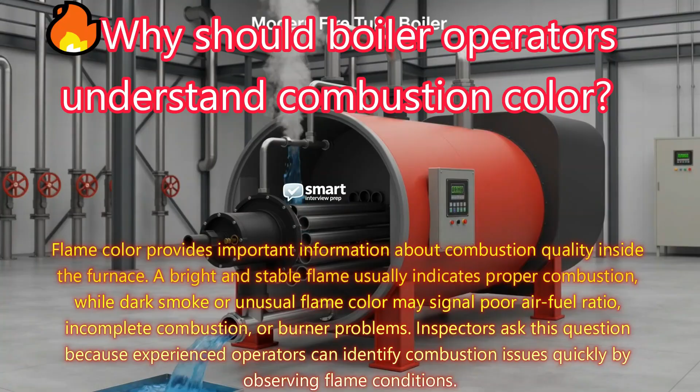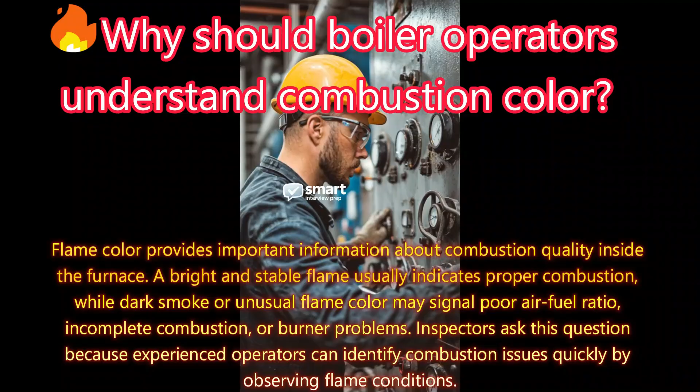Why should boiler operators understand combustion color? Answer. Flame color provides important information about combustion quality inside the furnace. A bright and stable flame usually indicates proper combustion, while dark smoke or unusual flame color may signal poor air-fuel ratio, incomplete combustion, or burner problems.

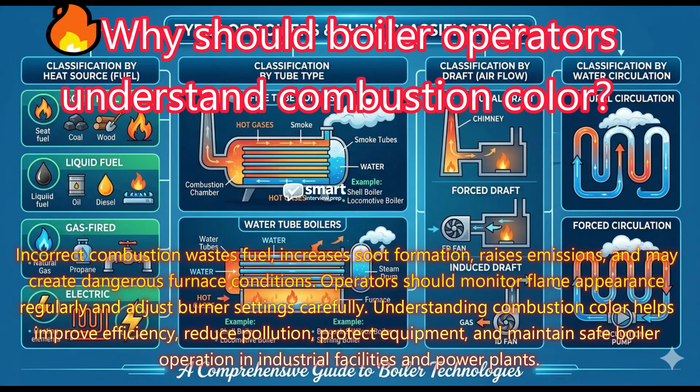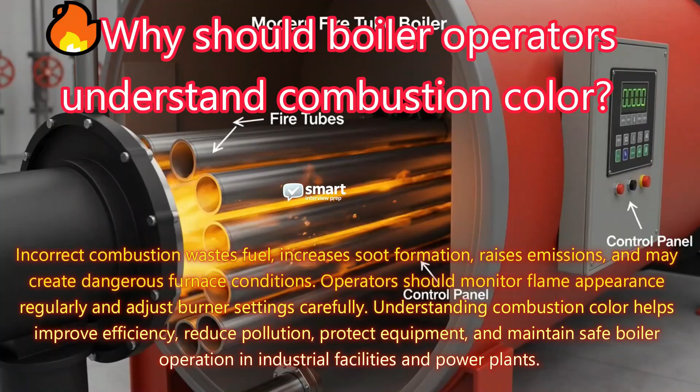Inspectors ask this question because experienced operators can identify combustion issues quickly by observing flame conditions. Incorrect combustion wastes fuel, increases soot formation, raises emissions, and may create dangerous furnace conditions. Operators should monitor flame appearance regularly and adjust burner settings carefully. Understanding combustion color helps improve efficiency, reduce pollution, protect equipment, and maintain safe boiler operation in industrial facilities and power plants.

Why are boiler records and logbooks important? Answer. Boiler logbooks provide a complete history of operating conditions, maintenance activities, inspections, alarms, and repairs. Accurate records help identify recurring problems, analyze efficiency trends, and support safe decision-making during operation. Inspectors ask this question because documentation is an important part of industrial safety compliance and professional boiler management.

Logbooks also help during troubleshooting, audits, and accident investigations. Operators should regularly record pressure, temperature, water level, fuel consumption, and abnormal conditions carefully. Well-maintained records improve operational reliability, support preventive maintenance planning, and demonstrate that the boiler plant is being operated responsibly according to safety regulations and standards.

Why is ash removal important in solid fuel boilers? Answer. Ash removal is necessary because ash accumulation blocks airflow, reduces combustion efficiency, and increases furnace temperature imbalance. Excess ash may also damage grates, restrict fuel burning, and reduce steam production efficiency. Inspectors ask this question to test practical operation and maintenance knowledge in coal or biomass-fired boilers.

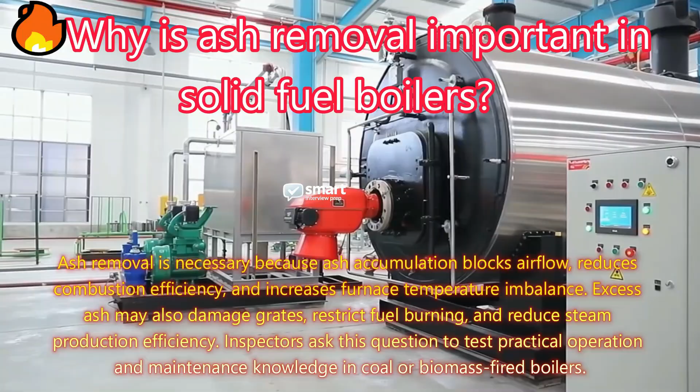Proper ash handling improves combustion quality, reduces clinker formation, and protects furnace components from overheating. Regular ash removal also improves workplace cleanliness and prevents unsafe operating conditions inside the boiler plant. Efficient ash management is an important part of maintaining reliable and economical operation in solid fuel industrial boiler systems.

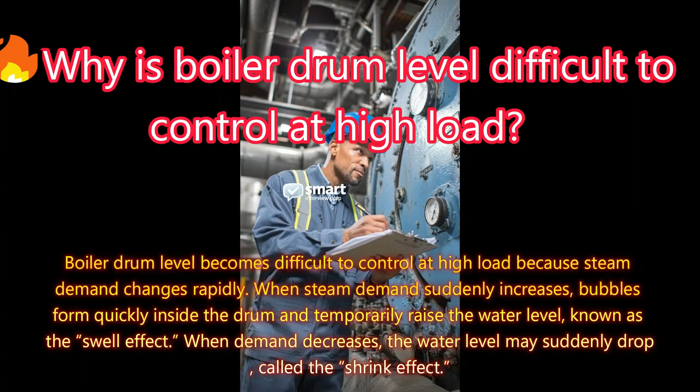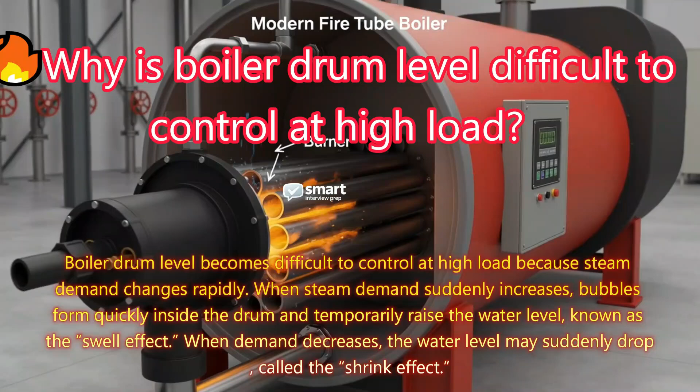Why is boiler drum level difficult to control at high load? Answer. Boiler drum level becomes difficult to control at high load because steam demand changes rapidly. When steam demand suddenly increases, bubbles form quickly inside the drum and temporarily raise the water level, known as the swell effect. When demand decreases, the water level may suddenly drop, called the shrink effect.

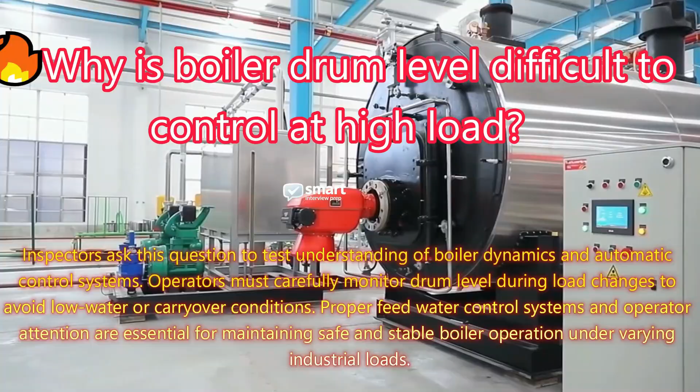Inspectors ask this question to test understanding of boiler dynamics and automatic control systems. Operators must carefully monitor drum level during load changes to avoid low water or carryover conditions. Proper feed water control systems and operator attention are essential for maintaining safe and stable boiler operation under varying industrial loads.

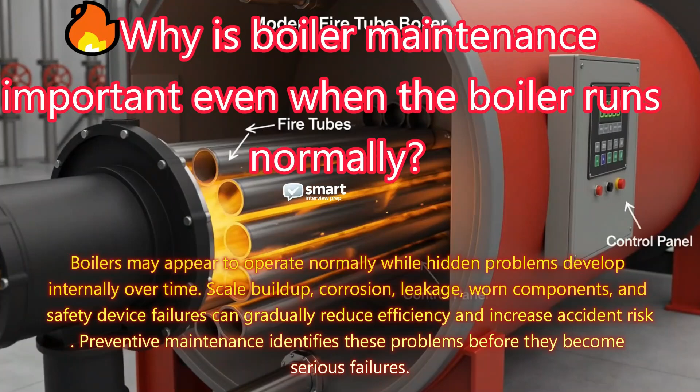Why is boiler maintenance important even when the boiler runs normally? Answer. Boilers may appear to operate normally while hidden problems develop internally over time. Scale buildup, corrosion, leakage, worn components, and safety device failures can gradually reduce efficiency and increase accident risk. Preventive maintenance identifies these problems before they become serious failures. Inspectors ask this question to test long-term operational thinking and maintenance awareness.

Regular inspection, cleaning, lubrication, calibration, and testing improve equipment reliability and reduce emergency breakdowns. Proper maintenance also extends boiler life, improves steam production efficiency, lowers fuel consumption, and ensures compliance with industrial safety regulations. A well-maintained boiler always operates more safely and efficiently than a neglected one.

Why should boiler alarms never be ignored? Answer: boiler alarms provide early warning signals about unsafe operating conditions such as low water level, high pressure, flame failure, high temperature, or equipment malfunction. Ignoring alarms can allow minor problems to develop into major accidents, equipment damage, or dangerous explosions.

Inspectors ask this question because operator response during abnormal conditions is extremely important for plant safety. Operators should immediately investigate every alarm instead of resetting it without checking the root cause. Proper alarm management improves operational safety, prevents costly downtime, protects workers, and ensures reliable boiler operation. A responsible operator treats every alarm as an important safety warning signal.

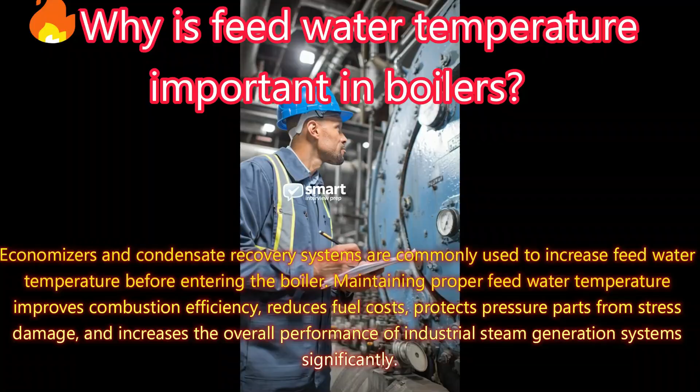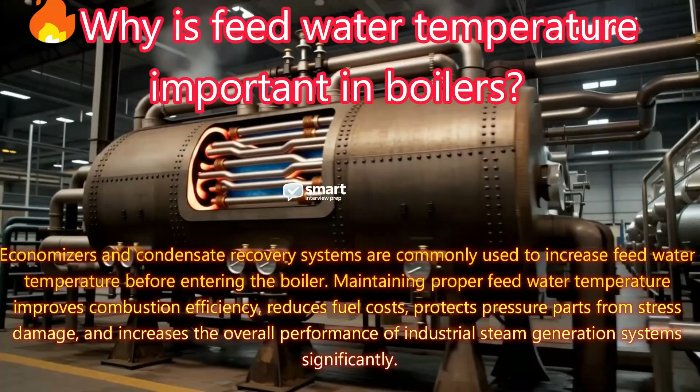Economizers and condensate recovery systems are commonly used to increase feed water temperature before entering the boiler. Maintaining proper feed water temperature improves combustion efficiency, reduces fuel costs, protects pressure parts from stress damage, and increases the overall performance of industrial steam generation systems significantly.

Why is boiler insulation necessary?

Answer: boiler insulation minimizes heat loss from hot surfaces such as steam pipes, drums, valves, and furnace walls. Without insulation, valuable heat escapes into the atmosphere, increasing fuel consumption and reducing system efficiency. Hot exposed surfaces may also create burn hazards for workers inside the boiler plant. Inspectors ask this question to test energy saving and safety awareness.

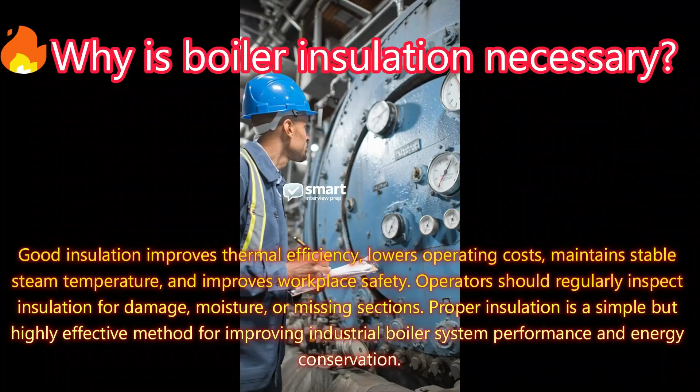Good insulation improves thermal efficiency, lowers operating costs, maintains stable steam temperature, and improves workplace safety. Operators should regularly inspect insulation for damage, moisture, or missing sections. Proper insulation is a simple but highly effective method for improving industrial boiler system performance and energy conservation.

Why is proper boiler shutdown procedure important? Answer: proper boiler shutdown prevents thermal shock, equipment damage, and unsafe operating conditions. If cooling occurs too quickly, metal parts contract unevenly and may crack or warp. Incorrect shutdown may also leave pressure trapped inside the system or create unsafe maintenance conditions.

Inspectors ask this question because many accidents occur during startup and shutdown operations rather than normal running conditions. Operators should reduce load gradually, stop fuel supply safely, maintain proper water level, and allow controlled cooling before inspection or maintenance. Following correct shutdown procedures protects equipment, improves operational safety, reduces repair costs, and extends the overall life of the boiler.

Why are boiler refractory materials important? Answer: refractory materials protect the boiler furnace walls and reduce heat loss from high-temperature combustion gases. These heat-resistant materials help maintain furnace temperature, improve combustion efficiency, and protect metal structures from direct flame exposure. Damaged refractory increases fuel consumption, creates hotspots, and may overheat surrounding equipment.

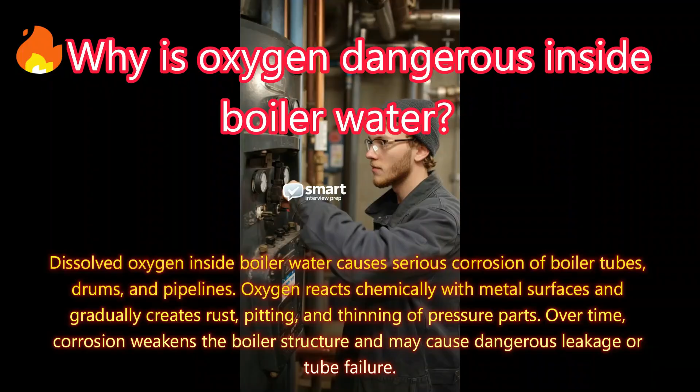Why is oxygen dangerous inside boiler water? Answer: dissolved oxygen inside boiler water causes serious corrosion of boiler tubes, drums, and pipelines. Oxygen reacts chemically with metal surfaces and gradually creates rust, pitting, and thinning of pressure parts. Over time, corrosion weakens the boiler structure and may cause dangerous leakage or tube failure.

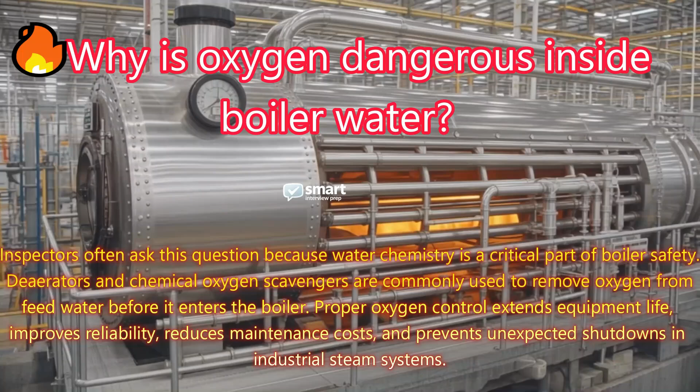Inspectors often ask this question because water chemistry is a critical part of boiler safety. Deaerators and chemical oxygen scavengers are commonly used to remove oxygen from feed water before it enters the boiler. Proper oxygen control extends equipment life, improves reliability, reduces maintenance costs, and prevents unexpected shutdowns in industrial steam systems.

Why should boiler load increase gradually instead of suddenly? Answer: boiler load should increase gradually because sudden steam demand creates rapid pressure and temperature fluctuations inside the boiler. Quick load changes may disturb water circulation, reduce steam quality, and create thermal stress on boiler components. In extreme situations, sudden load increase can even cause priming or carryover problems.

Inspectors ask this question to test operational discipline and understanding of boiler stability. A trained operator always raises load slowly while monitoring pressure, water level, combustion condition, and feed water supply. Controlled load variation improves efficiency, protects boiler parts, reduces operational stress, and ensures safe long-term industrial boiler performance.

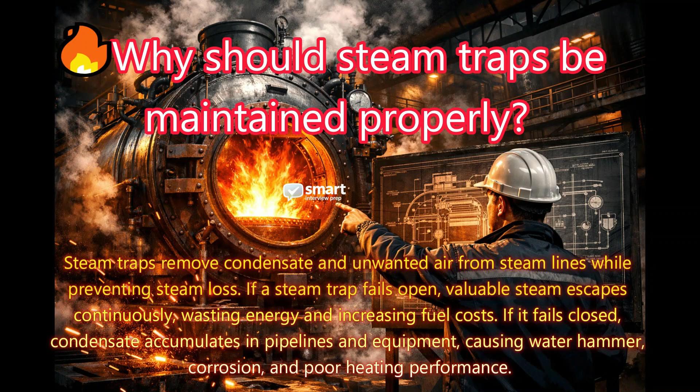Why should steam traps be maintained properly? Answer: steam traps remove condensate and unwanted air from steam lines while preventing steam loss. If a steam trap fails open, valuable steam escapes continuously, wasting energy and increasing fuel costs. If it fails closed, condensate accumulates in pipelines and equipment, causing water hammer, corrosion, and poor heating performance.

Inspectors ask this question to evaluate steam distribution system knowledge. Regular inspection and maintenance of steam traps improve energy efficiency, protect equipment, and ensure smooth steam flow throughout the plant. A properly maintained steam trap system reduces operational losses and improves the overall reliability of industrial steam systems significantly.

Why are boiler safety interlocks important?

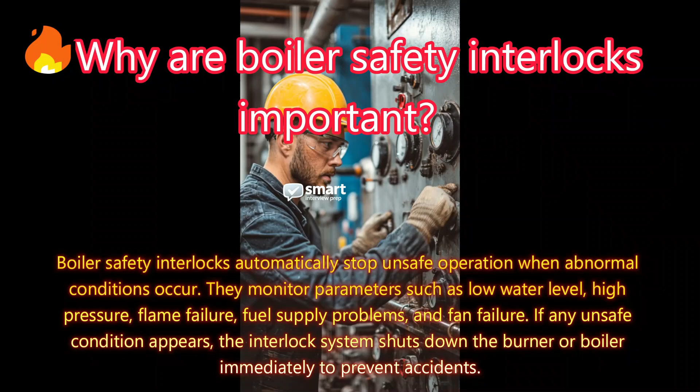Answer: boiler safety interlocks automatically stop unsafe operation when abnormal conditions occur. They monitor parameters such as low water level, high pressure, flame failure, fuel supply problems, and fan failure. If any unsafe condition appears, the interlock system shuts down the burner or boiler immediately to prevent accidents.

Inspectors ask this question because safety interlocks are critical for modern boiler protection systems. Operators must never bypass or ignore interlock alarms. Properly functioning interlocks reduce human error, improve operational safety, protect equipment from severe damage, and help prevent dangerous boiler explosions. Regular testing of safety systems is essential for reliable plant operation.

What is water hammer in steam pipelines? Answer: water hammer is a sudden pressure shock caused by fast-moving steam hitting accumulated water inside pipelines. This impact creates loud banging sounds and may damage valves, bends, supports, joints, and steam equipment. Water hammer commonly occurs due to poor drainage, faulty steam traps, improper piping design, or sudden valve operation.

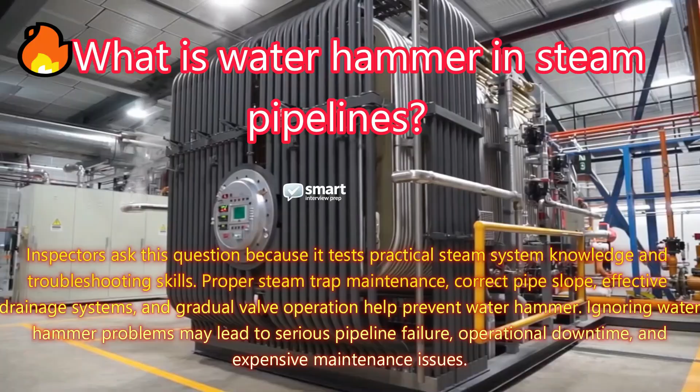Inspectors ask this question because it tests practical steam system knowledge and troubleshooting skills. Proper steam trap maintenance, correct pipe slope, effective drainage systems, and gradual valve operation help prevent water hammer. Ignoring water hammer problems may lead to serious pipeline failure, operational downtime, and expensive maintenance issues.

Why is condensate recovery important in steam systems? Answer: condensate recovery improves energy efficiency by returning hot condensed water back to the boiler feed system. Since condensate already contains heat, less fuel is required to convert it back into steam. Recovering condensate also reduces water treatment costs because condensate is usually cleaner than fresh makeup water.

Inspectors ask this question to test energy-saving knowledge and steam system understanding. A proper condensate recovery system improves boiler efficiency, conserves water, lowers operating expenses, and reduces thermal shock inside the boiler. Efficient industries always maximize condensate return to improve overall plant performance and reduce unnecessary energy losses in steam operations.

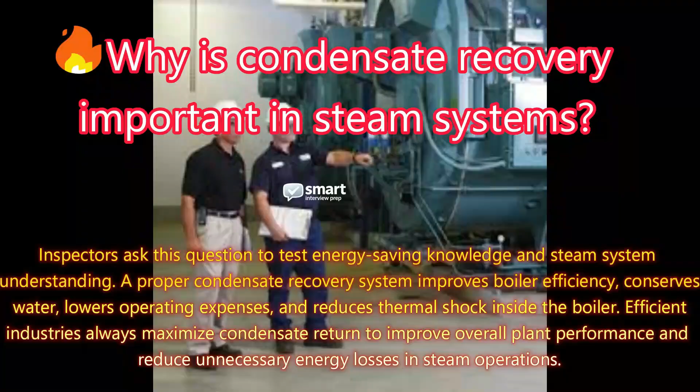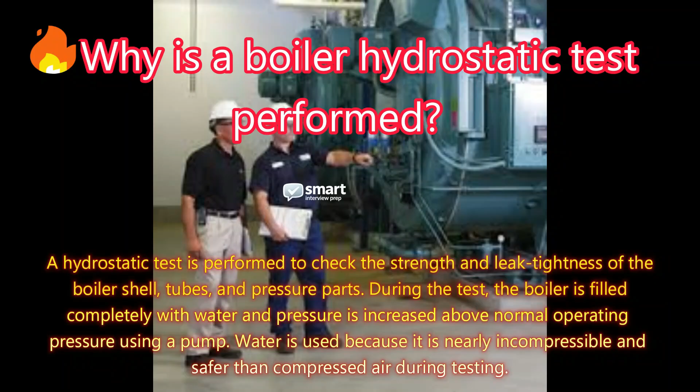Why is a boiler hydrostatic test performed? Answer: a hydrostatic test is performed to check the strength and leak tightness of the boiler shell, tubes, and pressure parts. During the test, the boiler is filled completely with water and pressure is increased above normal operating pressure using a pump. Water is used because it is nearly incompressible and safer than compressed air during testing.

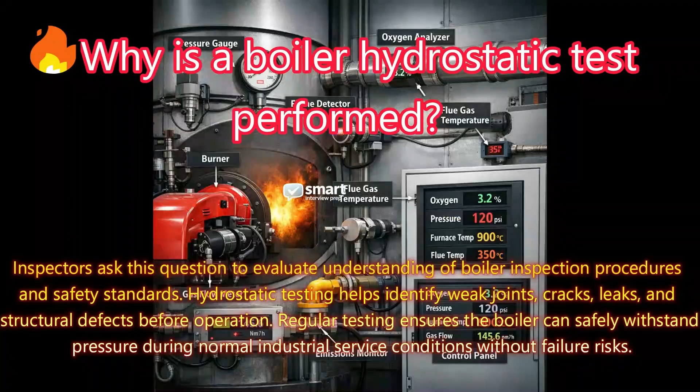Inspectors ask this question to evaluate understanding of boiler inspection procedures and safety standards. Hydrostatic testing helps identify weak joints, cracks, leaks, and structural defects before operation. Regular testing ensures the boiler can safely withstand pressure during normal industrial service conditions without failure risks.

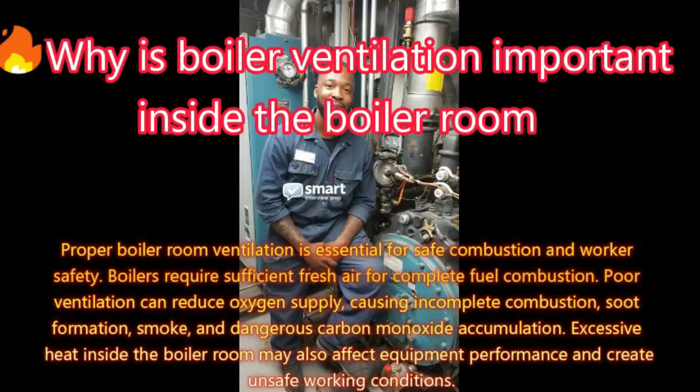Why is boiler ventilation important inside the boiler room? Answer: proper boiler room ventilation is essential for safe combustion and worker safety. Boilers require sufficient fresh air for complete fuel combustion. Poor ventilation can reduce oxygen supply, causing incomplete combustion, soot formation, smoke, and dangerous carbon monoxide accumulation. Excessive heat inside the boiler room may also affect equipment performance and create unsafe working conditions.

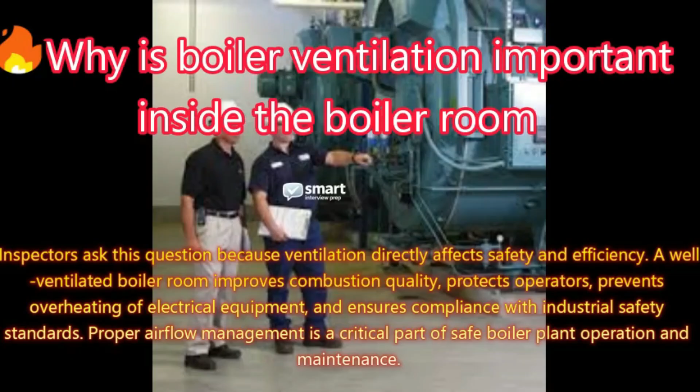Inspectors ask this question because ventilation directly affects safety and efficiency. A well-ventilated boiler room improves combustion quality, protects operators, prevents overheating of electrical equipment, and ensures compliance with industrial safety standards. Proper airflow management is a critical part of safe boiler plant operation and maintenance.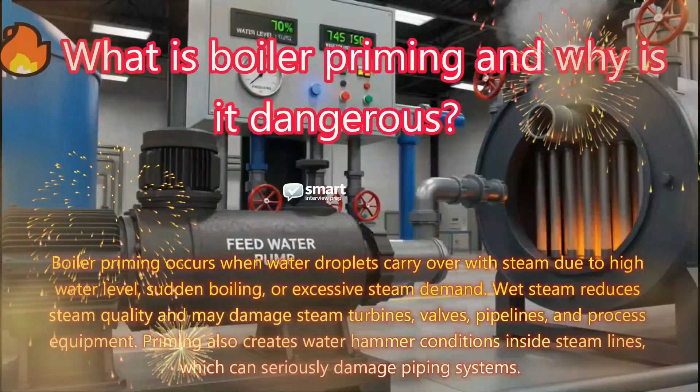What is boiler priming and why is it dangerous? Answer: boiler priming occurs when water droplets carry over with steam due to high water level, sudden boiling, or excessive steam demand. Wet steam reduces steam quality and may damage steam turbines, valves, pipelines, and process equipment. Priming also creates water hammer conditions inside steam lines, which can seriously damage piping systems.

Inspectors ask this question because it tests knowledge of steam quality and boiler operation. Proper water level control, good boiler design, correct steam demand management, and proper water treatment help prevent priming. Dry, high-quality steam is always necessary for efficient and safe industrial operation in steam systems.

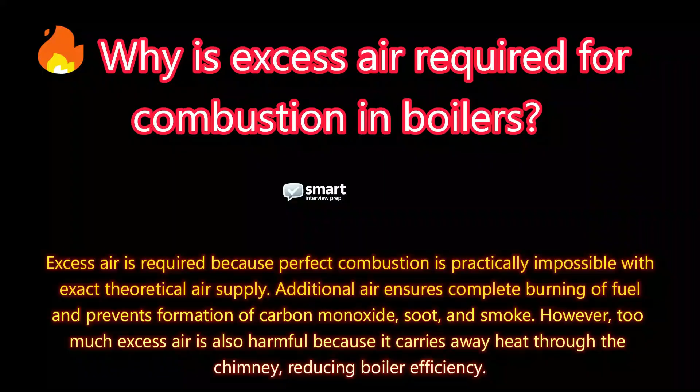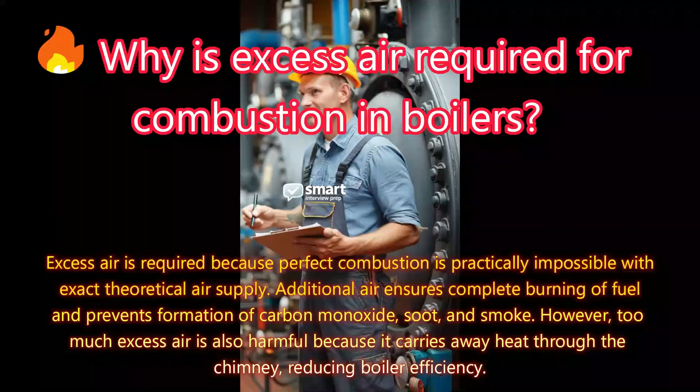Why is excess air required for combustion in boilers? Answer: excess air is required because perfect combustion is practically impossible with exact theoretical air supply. Additional air ensures complete burning of fuel and prevents formation of carbon monoxide, soot, and smoke. However, too much excess air is also harmful because it carries away heat through the chimney, reducing boiler efficiency.

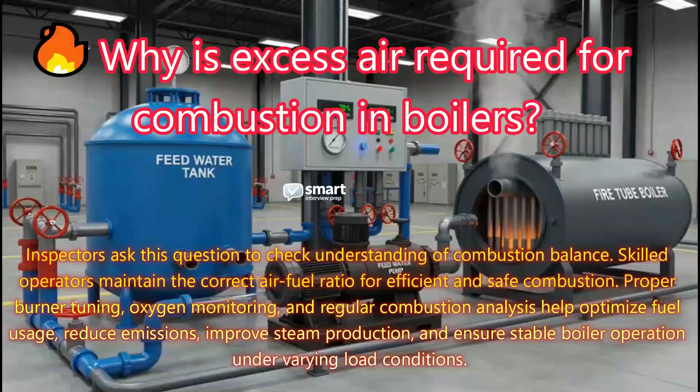Inspectors ask this question to check understanding of combustion balance. Skilled operators maintain the correct air-fuel ratio for efficient and safe combustion. Proper burner tuning, oxygen monitoring, and regular combustion analysis help optimize fuel usage, reduce emissions, improve steam production, and ensure stable boiler operation under varying load conditions.

Why is boiler efficiency reduced by soot formation?

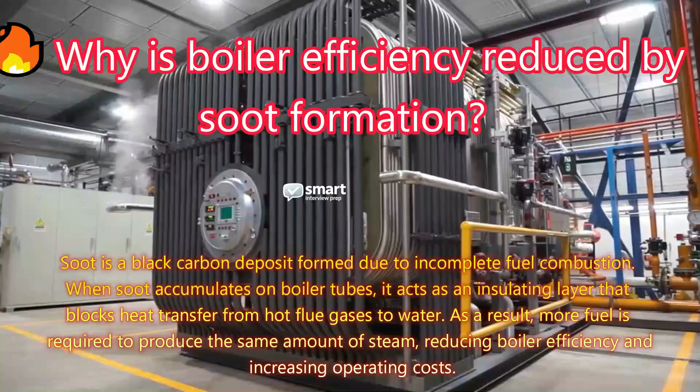Answer: Soot is a black carbon deposit formed due to incomplete fuel combustion. When soot accumulates on boiler tubes, it acts as an insulating layer that blocks heat transfer from hot flue gases to water. As a result, more fuel is required to produce the same amount of steam, reducing boiler efficiency and increasing operating costs. Excessive soot also increases flue gas temperature and may create fire hazards inside the boiler.

Inspectors ask this question to test combustion knowledge and maintenance awareness. Regular soot blowing, proper burner adjustment, and correct air-fuel ratio help maintain clean heat transfer surfaces and efficient boiler performance.

Why should a boiler never be started too quickly? Answer: Starting a boiler too quickly creates sudden temperature changes inside the boiler shell and tubes. Rapid heating causes uneven metal expansion, known as thermal stress. This stress may crack tubes, damage refractory materials, weaken welded joints, and shorten boiler life.

Inspectors ask this question because many operators focus only on production speed instead of equipment protection. A proper startup procedure allows gradual heating and pressure buildup, ensuring all components expand evenly. Slow startup improves safety, reduces maintenance costs, and prevents long-term structural damage. Professional operators always follow recommended warming procedures before bringing a boiler to full operating condition safely.

What is the first priority during a boiler emergency? Answer: The first priority during a boiler emergency is protecting human life and preventing further danger. Operators must immediately follow emergency shutdown, stop fuel supply, and activate alarms if necessary. If there is a risk of explosion, fire, steam leakage, or toxic gas release, the area should be evacuated quickly.

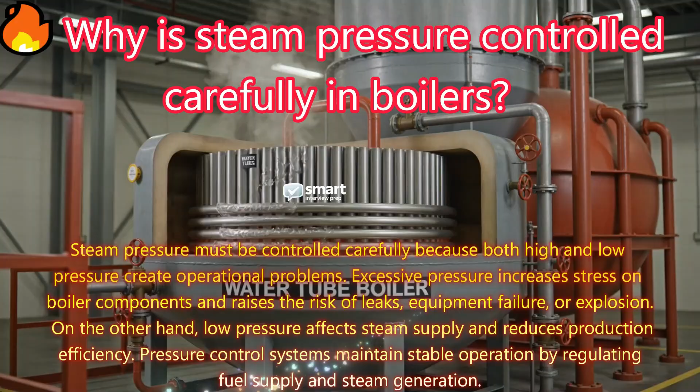Why is steam pressure controlled carefully in boilers? Answer: Steam pressure must be controlled carefully because both high and low pressure create operational problems. Excessive pressure increases stress on boiler components and raises the risk of leaks, equipment failure, or explosion. On the other hand, low pressure affects steam supply and reduces production efficiency.

Pressure control systems maintain stable operation by regulating fuel supply and steam generation. Inspectors ask this question to test understanding of boiler balance and control systems. Proper pressure management improves efficiency, protects equipment, and ensures safe plant operation. Operators should continuously monitor pressure gauges and control systems during boiler operation for stable performance.

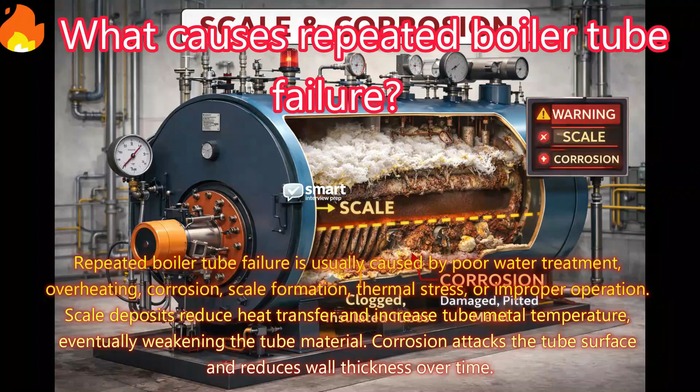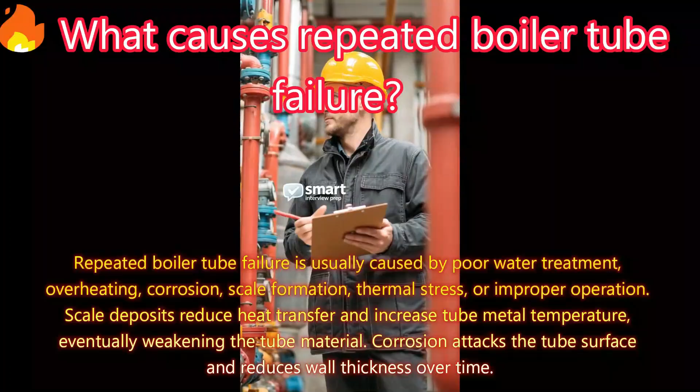What causes repeated boiler tube failure? Answer: Repeated boiler tube failure is usually caused by poor water treatment, overheating, corrosion, scale formation, thermal stress, or improper operation. Scale deposits reduce heat transfer and increase tube metal temperature, eventually weakening the tube material. Corrosion attacks the tube surface and reduces wall thickness. Over time, sudden temperature changes also create thermal stress that damages the tubes.

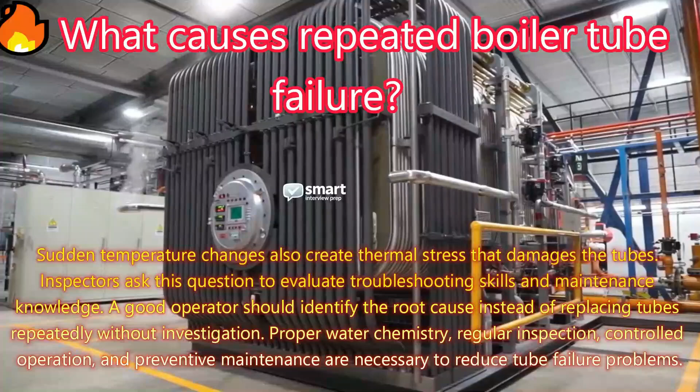Inspectors ask this question to evaluate troubleshooting skills and maintenance knowledge. A good operator should identify the root cause instead of replacing tubes repeatedly without investigation. Proper water chemistry, regular inspection, controlled operation, and preventive maintenance are necessary to reduce tube failure problems.

Why is furnace purging necessary before boiler startup? Answer: Furnace purging is the process of removing unburned fuel gases from the furnace before ignition. Fresh air is circulated through the furnace using fans to clear any combustible mixture. If purging is skipped and ignition starts while fuel gas remains inside, a violent furnace explosion may occur.

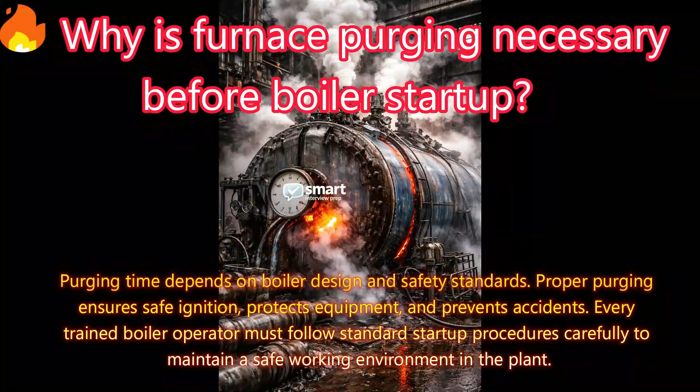Inspectors ask this question because many boiler accidents happen due to improper startup procedures. Purging time depends on boiler design and safety standards. Proper purging ensures safe ignition, protects equipment, and prevents accidents. Every trained boiler operator must follow standard startup procedures carefully to maintain a safe working environment in the plant.

Why should gauge glass be checked regularly? Answer: Gauge glass is used to indicate the actual water level inside the boiler drum. If the gauge glass becomes blocked, dirty, or damaged, it may show an incorrect reading. False water level indication is extremely dangerous because operators may think the water level is normal when the boiler is actually dry. This can lead to overheating and tube failure.

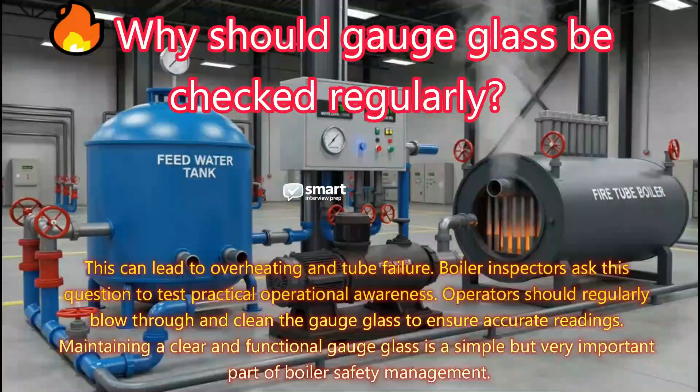Boiler inspectors ask this question to test practical operational awareness. Operators should regularly blow through and clean the gauge glass to ensure accurate readings. Maintaining a clear and functional gauge glass is a simple but very important part of boiler safety management.

What happens if a safety valve does not operate properly? Answer: The safety valve is one of the most critical safety devices in a boiler. Its main function is to release excess steam pressure automatically when pressure exceeds safe operating limits. If the safety valve fails, pressure continues increasing inside the boiler shell. Excessive pressure can weaken the boiler structure and eventually cause a dangerous explosion.

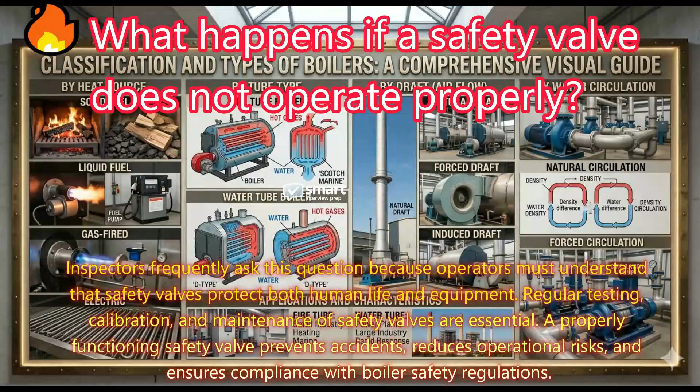Inspectors frequently ask this question because operators must understand that safety valves protect both human life and equipment. Regular testing, calibration, and maintenance of safety valves are essential. A properly functioning safety valve prevents accidents, reduces operational risks, and ensures compliance with boiler safety regulations.